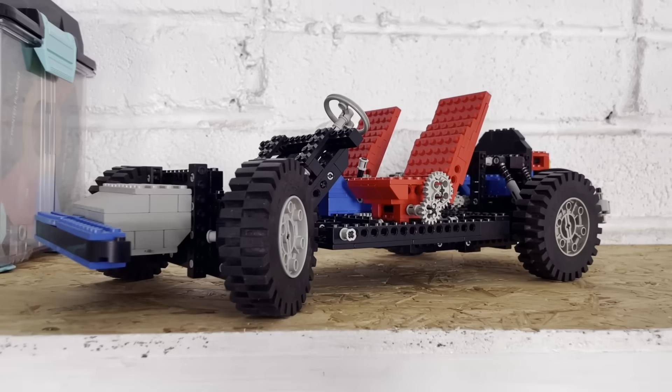You may already know that my first passion was Lego as a child, and my second passion was radio controlled cars. I built loads of radio controlled vehicles. It's one of the things I've always enjoyed doing, so building something like this is just going to be enormous fun, and it's going to be useful because I have some pretty difficult terrain outside. I'll show you that in a minute.

But before I go too far into this project, I better find out if my second-hand lawnmower purchase actually works.

Well, I'm pleased with that. The mower started really easily and it's cutting the grass really well. In fact, the grass is probably way too wet to cut right now. It's areas like this which are pretty hard to cut by hand. Trying to push the mower along a gradient or up and down a gradient is just hard work. In fact, it wants to tip over.

So this is where I hope the radio controlled beast is going to be way better. Feels like I'm going to have to make it very low center of gravity and also quite a wide track. Oh, it's going to need a lot of power too.

Let's take a quick look at the donor lawnmower for this project. It's actually a mulching lawnmower by a company called AS Motor. I think that's a German company. And a mulcher differs in the fact that it just chops the grass up inside of the deck here. It doesn't collect it and it doesn't eject it, which is ideal because effectively I'm rough cutting a lot of this area. And the push handle has to go, but I'm hoping to keep the height adjustment.

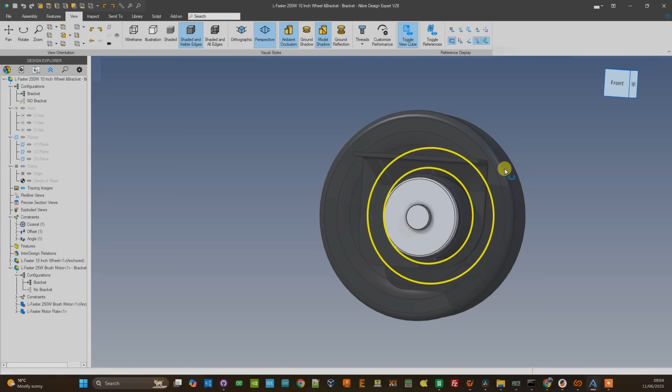Here is the L-Faster motor and bracket assembly, and here is the AS Motor mulching lawnmower model. The engine block is very basic, but it gives me its outer dimensions. I have modelled this mechanism, which is the height adjust mech.

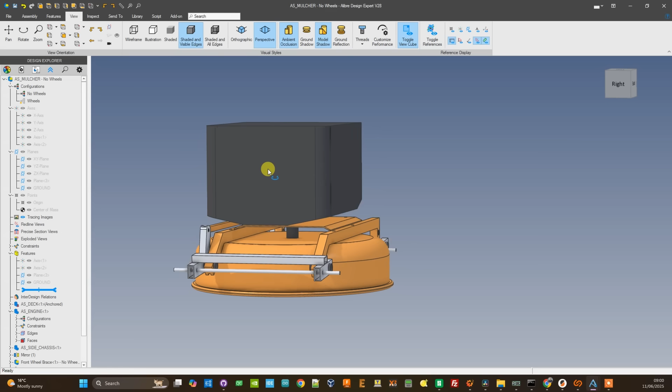The current idea I have is to remove the wheels and then build a frame around the outside, which will then attach to my new set of radio controlled wheels.

Here is the lawnmower fitted into my basic frame, which is 2060 extrusion with some custom motor brackets. The problem is it makes the wheelbase very long, and it's because I'm trying to utilise the existing lawnmower's lift and raise mechanism. The problem with having a long wheelbase is that it won't want to skid steer very easily.

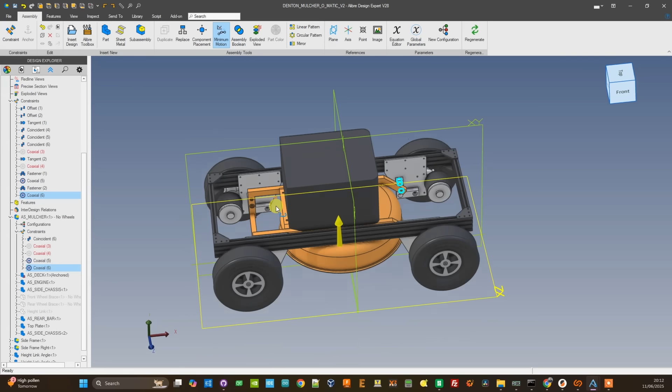So I decided to remove the front and rear axles and bolt directly onto the chassis. This might save a bit of space, but actually it didn't really make any difference. To get the same 60mm of travel up and down, I still have to move forwards and backwards 60mm on the same framework, which is just a waste of space.

So the wheels have to go, the front and rear mech, the chassis, and what I'm left with is the deck and the engine. Here's where I'm at with the current design.

It's a much stockier looking machine, and you can see I've managed to get the wheelbase quite a lot shorter. I've also gone a little bit narrower so you're not missing so much grass on the sides.

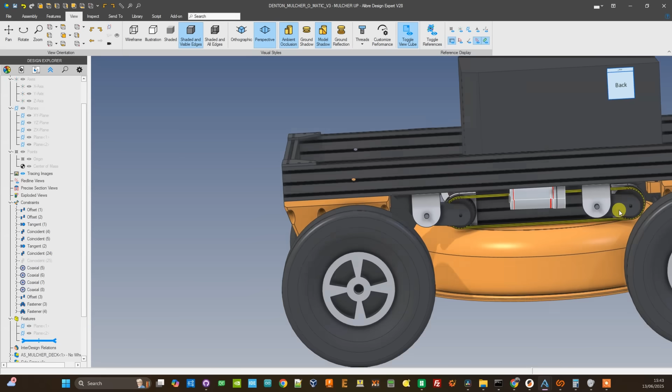The deck is now mounted with some 2060 extrusion, like the rest of my chassis is made out of, and that is also mounted via some linkages up to a linear actuator. Of course, this can be raised and lowered to set the height of the cut, and in the highest position should be out of the way so there's maximum clearance underneath.

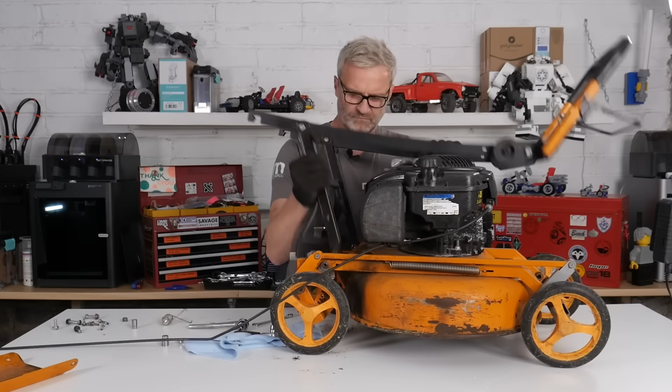Okay, let's get this machine stripped down. Yay! If there was one ball left in the ball bearing, now there's none.

Which way does the nut on a lawnmower blade spin? Anti-clockwise when viewed from underneath, which means that it's standard thread, and anti-clockwise spinning blade when viewed from the bottom. So anti-clockwise to undo the nut.

The Torx bits, I'm going to try the impact driver. I really don't like using them on small rusty bolts like this, but I can't seem to get any purchase or torque on this. It's not stripping it, but it isn't moving either. I really don't want to break them.

I thought I'd try one last trick to get this moving, and it's worked, and that is to go forwards a little bit before you go backwards. I've also soaked them in WD-40, which is probably helping.

The problem with lawnmowers with steel decks is they always end up rusting, so you do have to look after them, which most people don't. This one isn't too bad, to be honest, but once I got it apart, I should probably give it a coat of paint just to protect it.

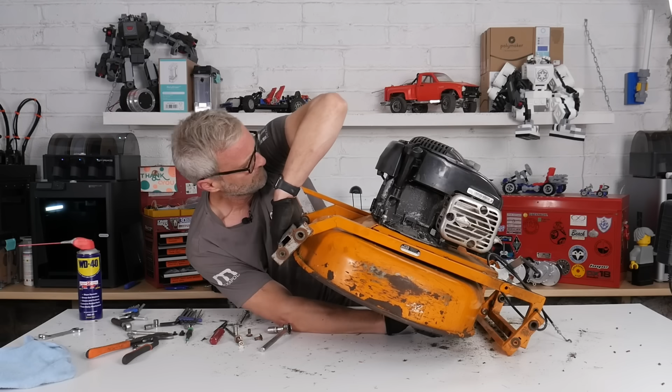Yay! Number 2. There it is. I hope that's supposed to drop out.

Steel on brass, there's like no bearing. Well, whilst I've got the deck off, I suppose it's a good time to clean it up and maybe give it some fresh paint.

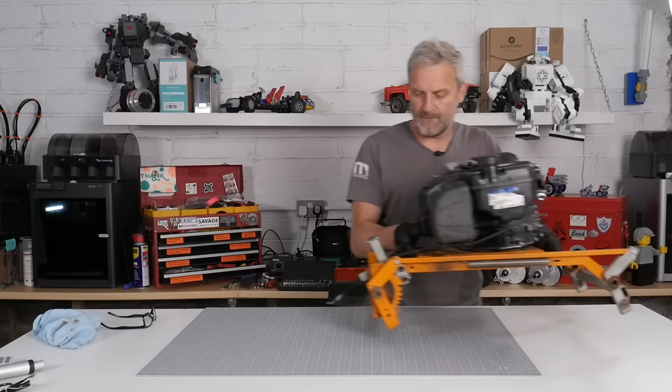I've had a tidy up and I'm ready to remove this engine from the frame. Now that's good, the keyway has stayed in the motor shaft.

So this is what I'm left with: the engine, the blade, the engine coupling and the deck. Yeah, I'm well aware that I could have bought all these bits individually now. I genuinely thought I was going to use the chassis and raise and lower mech, but there we have it. These projects change as they go along.

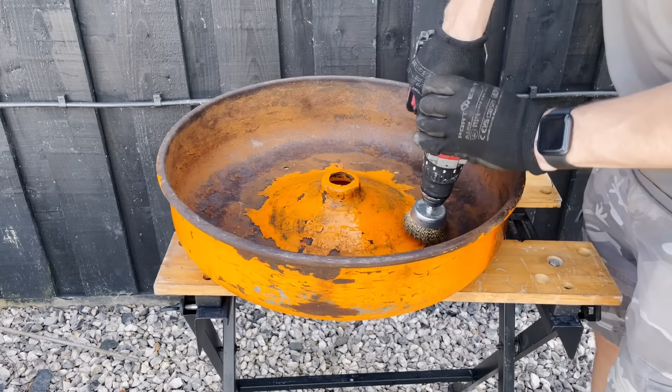Let's move on. While the deck is off, I thought it would be a good idea to give it a freshen up. So first of all, I remove all the flaky paint and rust, then give it a spray out with some brake cleaner. Next, I'm going to apply a layer of Hammerite Kurust. This kills the existing rust and turns it black and blue in colour, then you can paint over the top.

One hour later, you can see the Kurust has turned black. I'm going to paint with two coats of Hammerite red oxide paint. While that's drying, I'm going to crack on with something else.

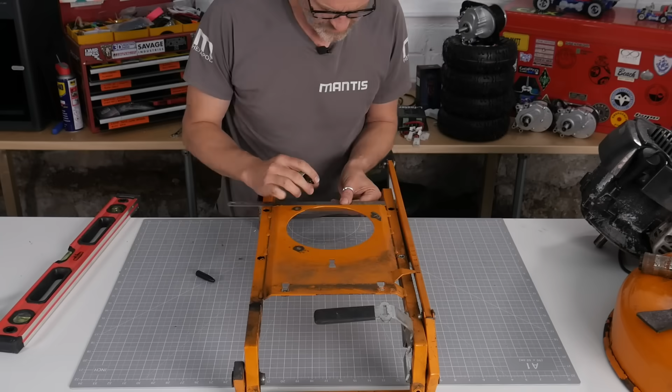There's no determinable pattern on the engine mount holes, and I couldn't find a specification sheet online so that I could take them from a drawing, so I've had to take some very careful measurements. I can now transfer these measurements onto my engine mount flange, but I will have to redesign the flange slightly because at the moment one of the holes goes right through one of the folds.

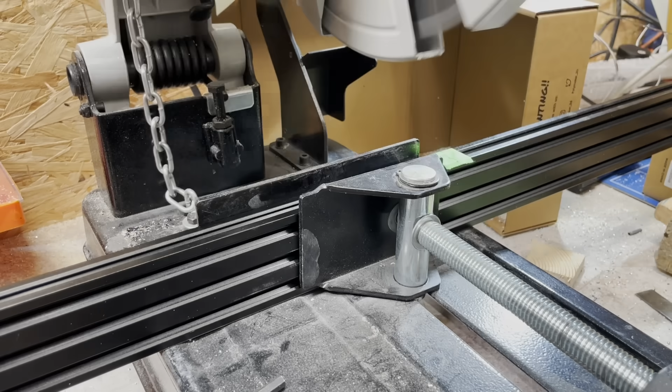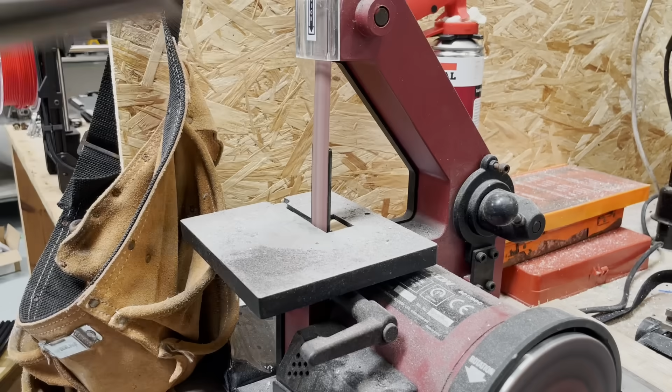The 2060 extrusion has arrived, so I'm going to cut my chassis pieces to length. This extrusion was slightly cheaper because it was classed as seconds, however I wasn't expecting it to be partially anodized on one side. Having carried out all of this design in CAD, I feel it's time to start assembling the chassis so that I can test that it all goes together.

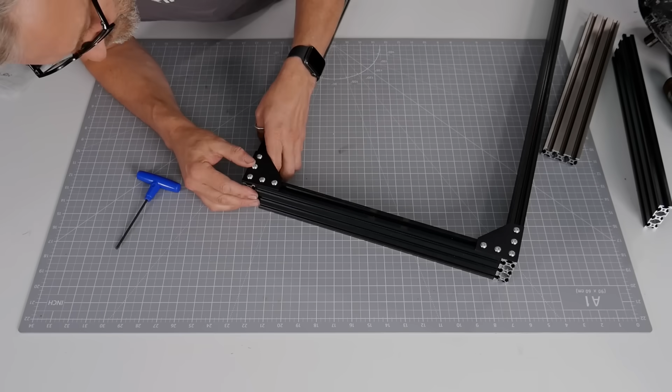Once the chassis is assembled, I can also test the radio control kit. As of now, I have no idea if it's going to be powerful enough, or the right speed, or whether it's going to work. I'm trying to keep the assembly as square as possible as I go. I may need to adjust this once it's all together.

I'll print the corner blocks on my Bambu H2D printer. Once I'm happy everything fits together well, I'll reprint these with more infill and perimeters and in a high temperature PLA from Polymaker. You can see the CAD model wasn't quite correct because the holes don't line up, so I'll just fit these together with a single fitting for now, just so I can test this chassis build out.

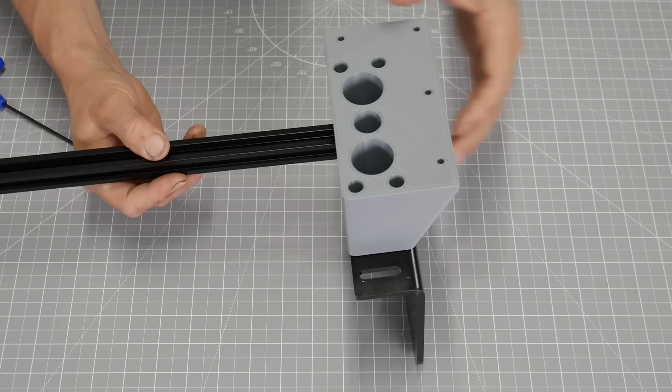In order to make the chassis design easier, I put these holes where I needed them rather than trying to line them up with the slots, so I do need to drill a couple of holes in the motor plate. I'm going to use a simple 3D printed template. This locates in the existing mounting slots and gives me the position of the new holes.

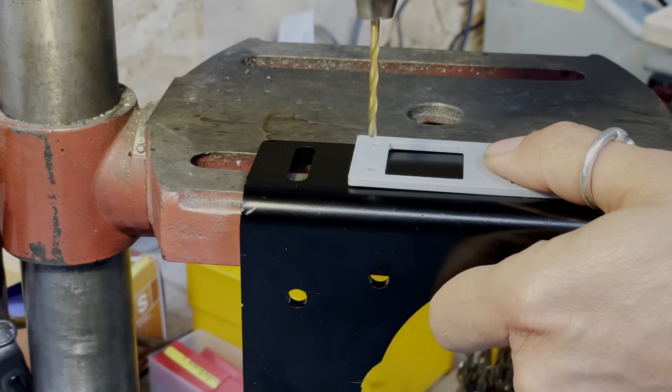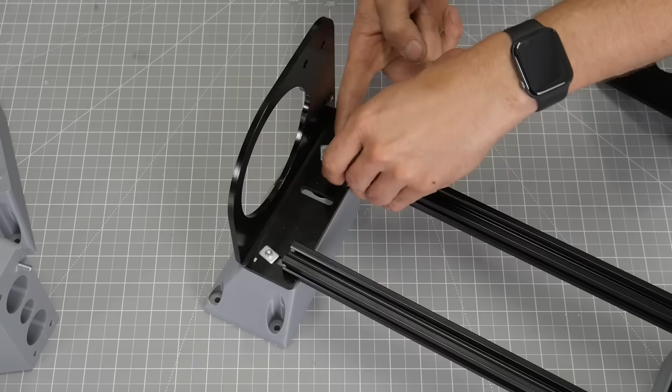There's a little fiddly getting this whole chassis bracket assembly together, but everything's finally lining up and I now have two sets of wheel brackets.

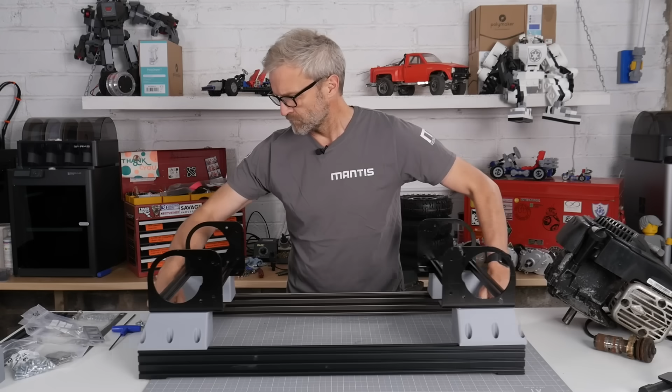These corner blocks haven't aligned really nicely with the corner of the chassis, but the beauty of using extrusion is that it's easy to adjust.

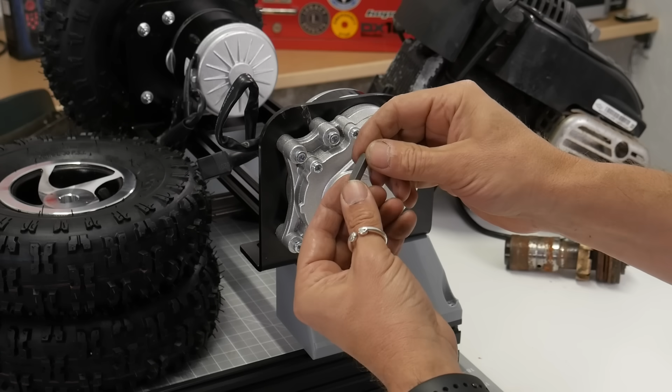The output spline on the motor and the hub on the wheel have a matching keyway to stop them from rotating, and they're held in place with a single bolt and washer. I may add a small amount of thread lock or an anti-vibration washer as well.

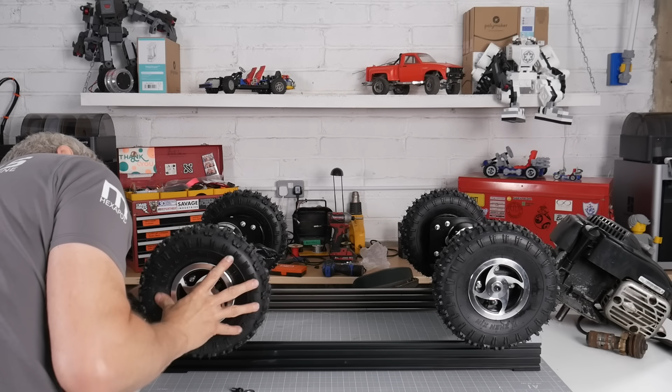I love it. I need some air in the tyres because they're flat. Imagine what it's really like when this engine's on and all the orange detailing and stuff. It's going to look epic.

All I have to hope is that it actually works, because there's a lot of weight, and to skid steer something takes a lot of torque.

Now I've gone for the slightly higher speed motor set, so they do up to 6 kilometers an hour. There was a higher torque, lower speed set at 4 kilometers an hour, but I thought that was a little bit slow. But I'm hoping they're still powerful enough. I mean, it's 1,000 watts of power.

But the only way to find out is to get the motor controller on here, some batteries, and then take it for a little spin. I've just temporarily fixed the motor controller here, and I've got a 22 volt LiPo battery to run it all on. Let's power up.

Got a big fan, I've got flashing lights, turn the controller on. Perky sound. That's gone solid green, that's good. Let's just try it.

Hello. That looks really fast. I mean, for a lawnmower, it's way faster than 6 kilometers an hour. Oh no, have I gone for the... Should I have gone for the high torque?

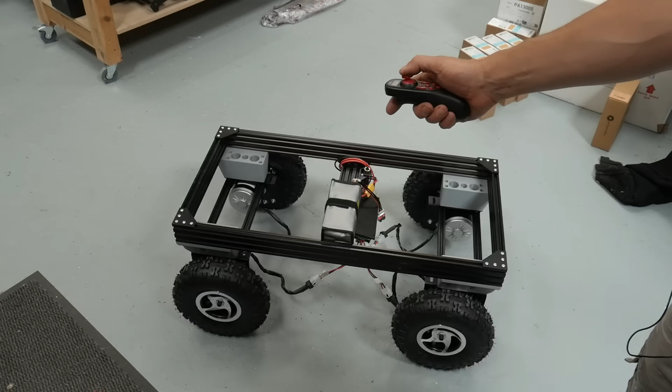Let's get it on the floor and try it. It is turning pretty well, but then this floor is slippery, so I would expect it to. The slow speed control, that's about as slow as it will go. And I feel like there are times when you'd want it slower than that. Is this a terrible idea? Okay.

Well, that's got plenty of power, and it will steer on the spot with 85 kilos on it. That's pretty good. Not bad at all, but it does seem pretty ferociously fast. The acceleration is crazy. It's too much really. Well, there's not much I can do about that.

Of course, there are things that could be done. For example, I could run it on a lower voltage, like 12 volts, so it would halve the speed. The problem is you're only going to get half the power, reducing the output to 500 watts. That might be enough, so maybe that's an option.

I could replace all the motor gearboxes with the 4 kilometer an hour versions, but that might be quite expensive. Or I could try contacting Faster and see if it's simply a case of swapping some gears out, because they might do replacement gear sets for these, and I wonder if the casings are the same, just a different gear combo inside. So I'm going to try that first.

I know it sounds weird, I'm sure people are thinking you want it as fast as possible, but actually when you're trying to do precise things like mowing a lawn, you need control at slower speeds, and at the moment this feels like it's going to be too difficult to control at low speeds. I want to continue the build anyway and try it out, but that's my first concern - I think it's too fast.

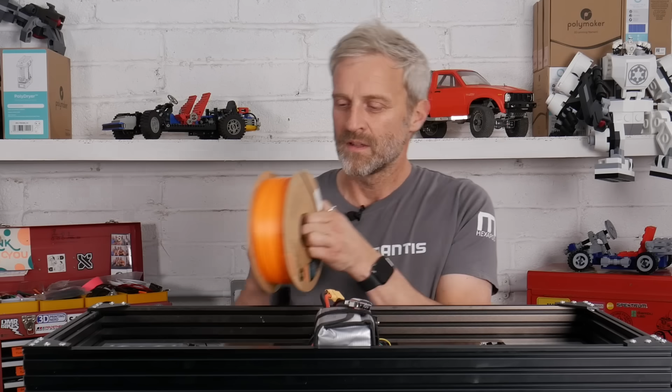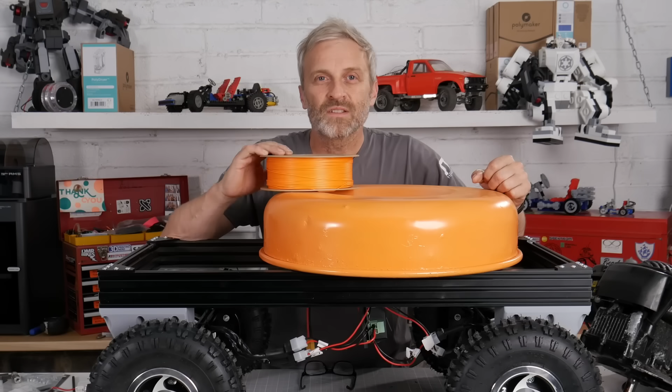I've just received a shipment of a couple of reels of Polymaker's new high temperature PLA in orange, which looks beautiful, especially next to the deck I've resprayed. Look at that, it's going to look peachy. So I'm going to load this into my Bambu H2D printer and print these parts out in a much stronger version. Whilst that's going on, I'm going to take this outside and test it on some rougher terrain.

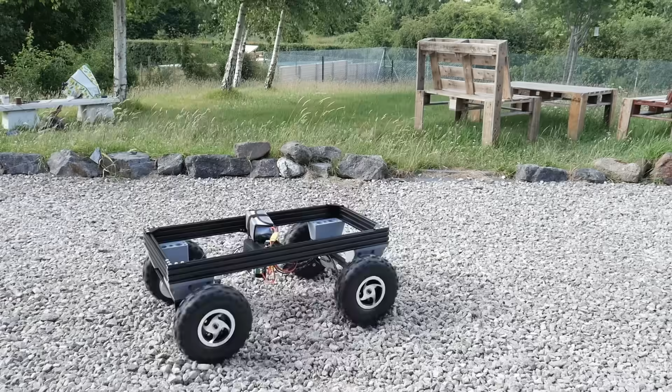My very weak PLA mountings gave way very quickly when I tried to turn it. I got carried away with my test rig there, forgetting that I'd only put 2 bolts either side. It ripped through the bottom layer, maybe the top layer too, and there was only 2 perimeters and very little infill. I've printed a new one which has double everything - 4 perimeters, double the infill, and double the top and bottom layers.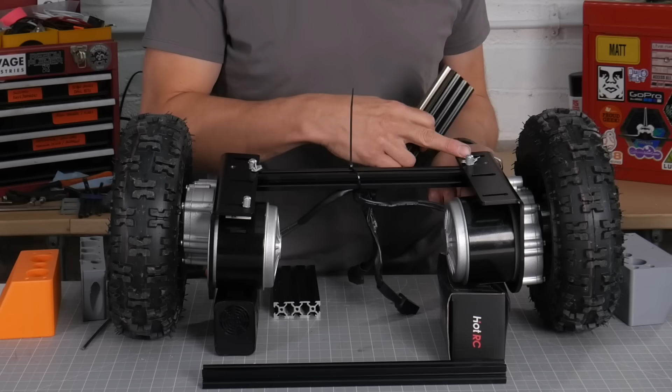But the more important thing now is that I'm printing it this way on the bed, whereas this one was printed this way on the bed, so the layer lines are much better aligned when it's mounted on the chassis. I'm also going to add some additional aluminium extrusion, bolting through the back of the motor plate, through this part here, and then into the side of the chassis member. I'll also add some steel webbing for strength, then test it all again under some proper load conditions.

Here's the new completed chassis. I've got my additional bracing down to the motor plates here, and some additional cross bracing across the chassis which also connects to those down braces to the plate, and of course the new and improved 3D printed corner blocks. I'm going to stick the wheels back on and then take it for another spin. Oh god, this is going to be a 2-man lift.

Well, this is the point where it failed yesterday once the traction in the grass was too much. Well, I don't know about cutting the grass, I can just tear it up with the wheels. Well, that seemed to be behaving pretty well.

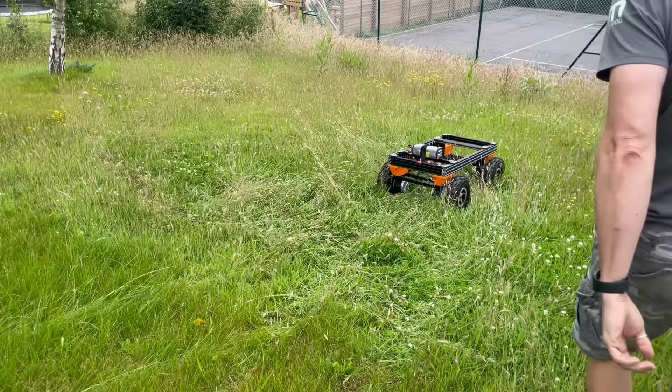Of course, I've got to try it under load, so loads of power. I don't know about turning. Oh well, God, that's churning the grass up, but that's way too much load for this. It's working pretty good because it's going to be at least half my weight, at least.

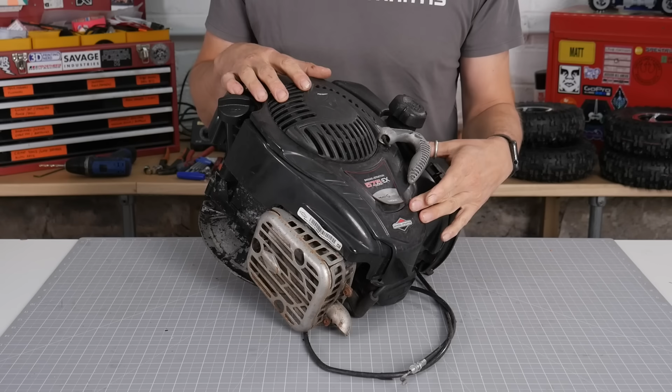I'm currently waiting on some parts to arrive, so I thought it would be a good time to take a look at this engine, how it runs and how I'm going to control it. This is a Briggs & Stratton engine, 140cc, and I'm going to leave it as a pull start, so you have to manually start the engine, but I need to be able to remotely stop it.

So I'm going to start by taking this pull start lid off. What we have under here is the pull start mechanism, which attaches to the underside of here. This flywheel, if you like, with cooling fins - it's really quite a neat design because effectively it sucks air down through and over the engine fins to cool the engine. But it also acts as the spark generator, this piece here. As this spins around, there's 2 contacts here, and that generates the spark with the correct timing for the engine.

I love the simplicity of it. Here there's a piece which goes into the exhaust pipe, and this little lever here which comes across. So this is the carburetor, and this little lever is attached to it, and in here is the air intake and air filter. So this is effectively like an automatic choke. When the engine's cold, this sits here, and when it gets hot, this moves across and changes the mixture.

The thing I need to be able to do is stop this engine remotely. Currently this cable here is usually held on by the user on a big grip to enable the engine. What that does is release a brake off of this spinning mechanism, and it also disengages this little basic switch which shorts a wire to the chassis.

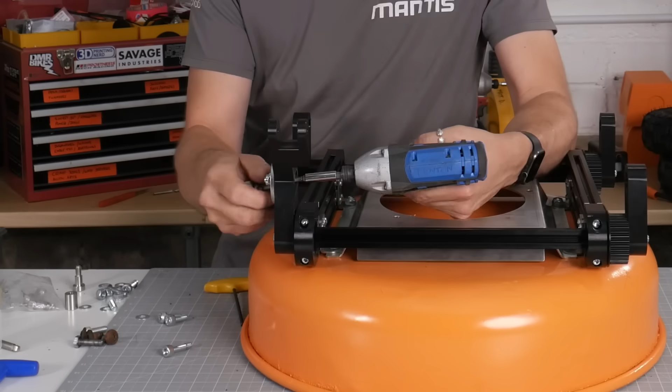Now the distance from one side of the chassis to the other is 420 mil, at least on the CAD drawing it is, and that is 420 mil. Let's have a look at the back one. 420 mil. Boom! Get in! I love it when a plan comes together. I wonder if the chassis is actually 420 mil though, which it might not be. I'm going to measure it. Hang on. 420, maybe 0.5, so pretty good.

Keyways in. There's one. There's two. And there's three.

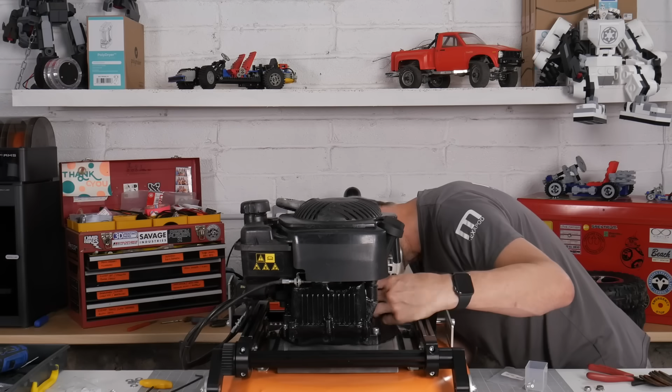I'm happy with that. As per the original design, the original lawnmower, you have to take the chassis off and the plate before you can unbolt the motor, which is a pain. So, do I take that lovely folded stainless steel plate off and grind down that front fold so it's shorter, so I still have the strength but I can get a spanner under? Or do I just bolt the motor onto it and be done? The problem is it's going to be hard to adjust if I need to make any adjustments without having that.

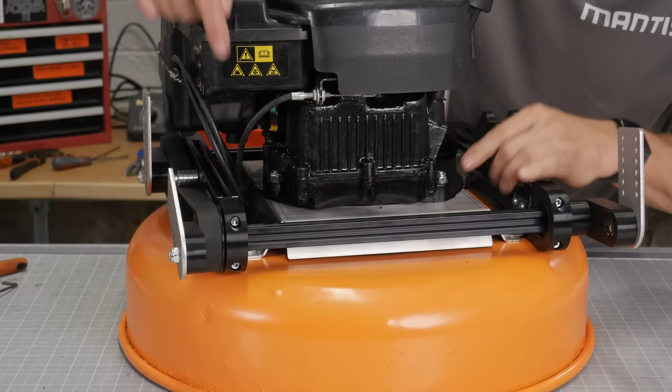Conundrum. I finally made a decision and went ahead and bolted the engine down to the stainless steel mounting plate. So that now if I want to make any adjustments, I'll have to loosen the stainless steel plate from the decking to move the motor around. It all feels pretty solid though.

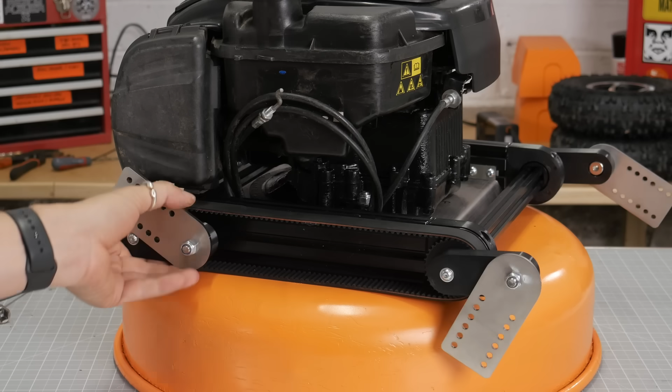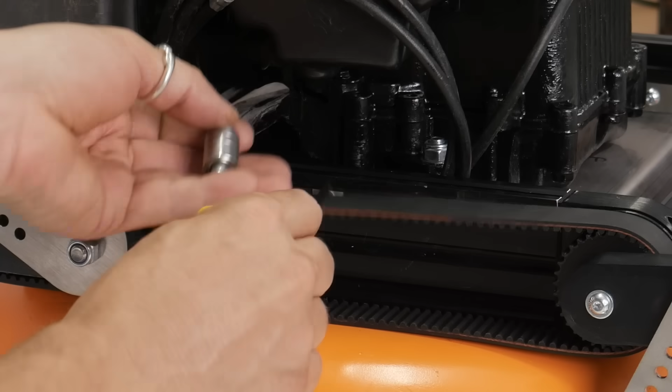I now have the timing belt, so I've been able to fit the front and back sections together. However, it turned out to be way too loose, so I've had a 3D printed shim that sits between the bearing holder and the aluminium extrusion. I can tighten this further using a stack of bearings on an M5 bolt screwed into an M5 nut within the extrusion. This tightens up the whole belt quite nicely.

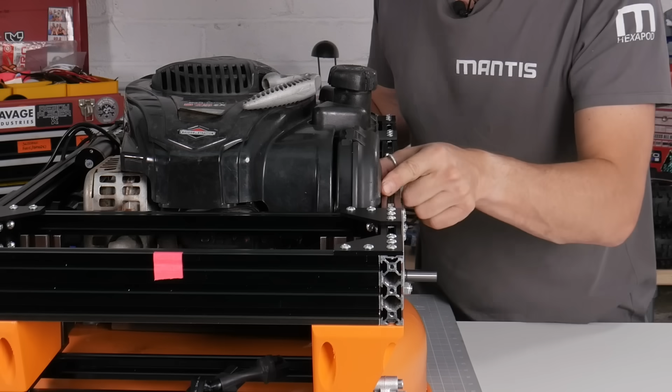Well, with much huffing, puffing and a little bit of cussing, I managed to get the chassis over the engine. It was a little tricky getting this in, and I will say that this side is very tight. The air filter is actually touching the side there. I mean, it's not hard pressed up against it, but it is right on the edge.

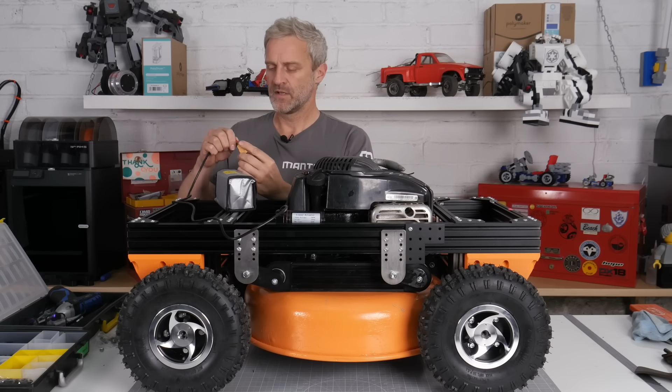Let's see if this linear actuator and the lift mechanism works. That's heavy. Don't know which way around to go. Oh, okay, so that's one end stop. Oh, that's smooth. I think it's worked. That looks pretty good.

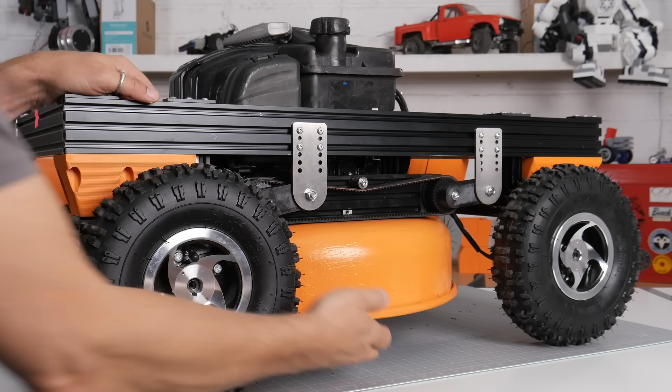Obviously working harder to bring it back up, but it is working. From this angle you can see that the left hand side is lower, and I can lift it back into position. The cause of this problem seems to be the 20mm extruded axle going across the front, which is being allowed to twist across here. This twist is allowing the left hand side lift arms to drop out of position.

There are a number of things I can do to limit the droop on this side of the machine. I could add a load spring which lifts this arm up, puts it under tension, or I could replace that front axle with a solid metal shaft that will stop it from torsioning, or I could replace the belt system with a single fixed linkage. However, none of this really matters at the moment - it just means my cut will be slightly skewed, and that doesn't really matter for a rough cutter. I'd rather just see if it works.

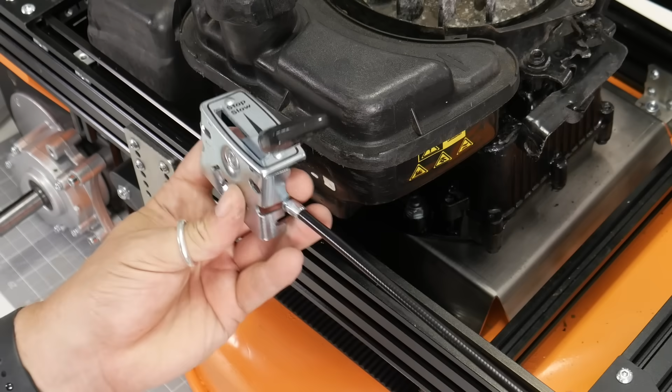I found this simple throttle mechanism that's made for lawnmowers that I'm going to use to replace the dead man handle on the lawnmower, which will operate both the electrical stop and the brake stop.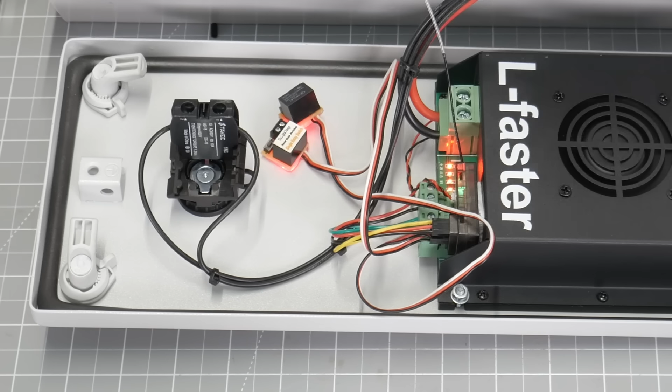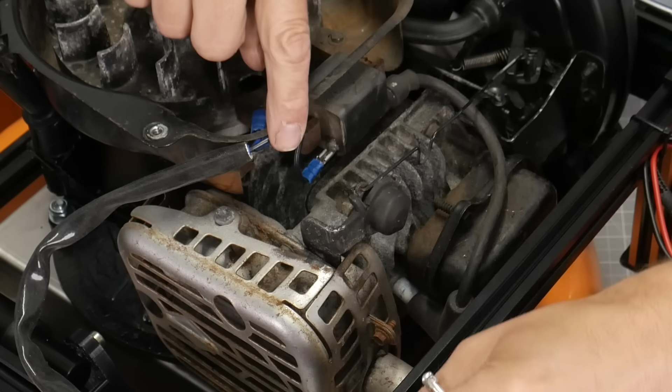I've added a loom to both sides for the left and right hand motor that runs down the chassis, and of course I've added battery cables to my batteries. I still have to finish off the wiring for my linear actuator because I'm waiting on the radio controlled relays for that. I've added the engine stop loom here, which runs through this piece of silicone high temperature sleeving, because it runs past the exhaust pipe, and it runs in parallel with the existing stop mechanisms. I've also added these 3D printed battery clamps to stop the battery from coming out.

I'm now going to install my electrical enclosure onto the chassis onto these 4 anti-vibration feet. I am slightly concerned that there will be quite a bit of vibration from the engine, so I have tried to use nylocks and anti-vibration washers wherever possible.

So I assume that's powered up, we should hear it. Yep. No. Is it because my remote control was not switched on? Yes, there we go. Now it's powered up because the remote's on.

Let's see if she works. Are they going forwards? They're not going forwards. Well, they're going forwards on that side, and this side they're going backwards. Have I got my left and right mixed up? What I didn't notice on the motor controller, there's a positive and negative for each motor output, but they'd switched the left-hand side positive and negative. I wired it positive to positive, negative to negative, but I need to switch them to reverse the left-hand side, and that should sort it out.

Yes, forwards on this side, left. Yes, this side's going backwards, right, yes, backwards, yes, bingo.

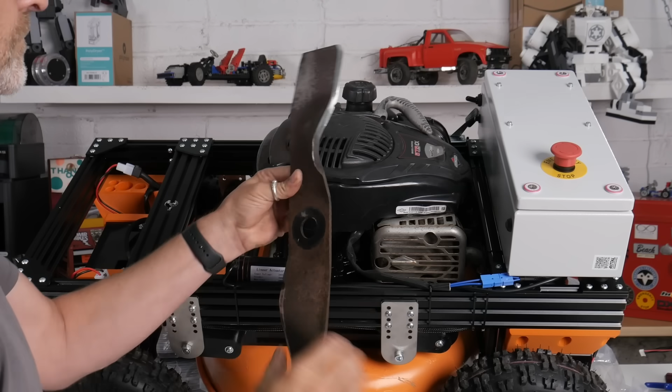All I've got to do now is figure out how I'm going to get this off the table, because that's heavy. This blade was looking pretty blunt, so I've just given it a sharpen up with a flap disc. As soon as I've remembered how to reinstall it, we'll take it for a spin.

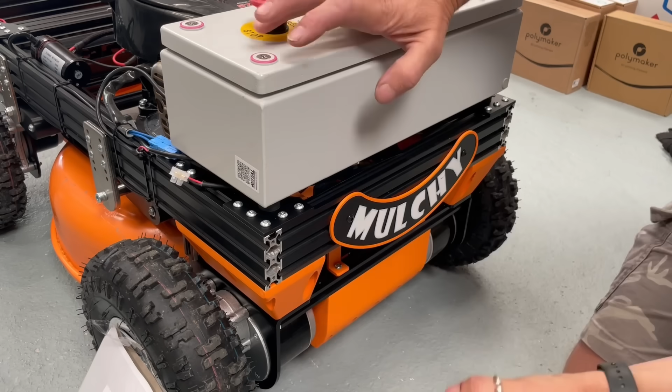No pun intended. I was going to ask my subscribers to name this new machine, but I'm fairly sure my English viewers would have come up with the name Mulchy McMulchface. If you don't know what I'm talking about, look up Boaty McBoatface. So I present to you Mulchy.

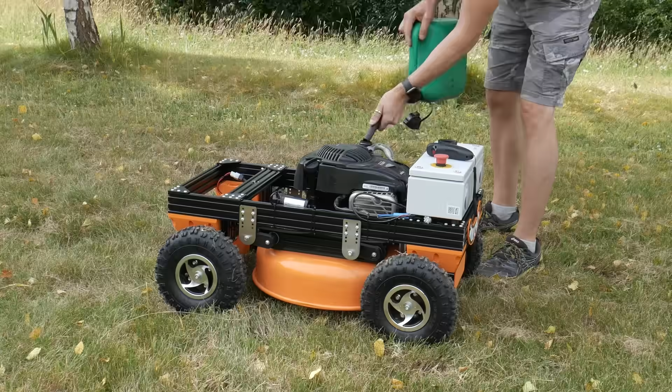Well, it seems to be turning pretty well. It is a little front heavy, so the back end wants to spin out before the front. So that's the brake off. Let's try.

All right, well, that's pretty good. Fired up first time, and the brake and shut off worked okay. Some grass over there.

Oh, I was going to say, look at it go, and then it didn't.

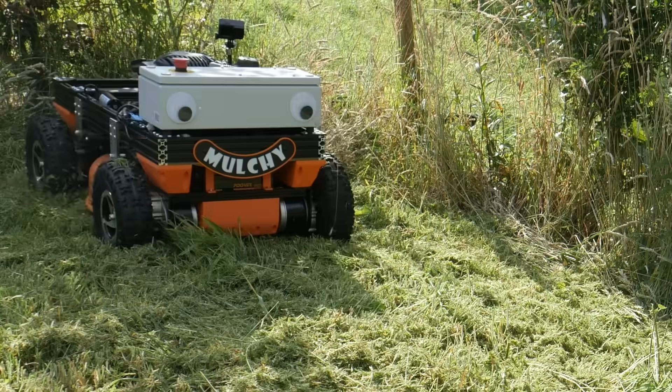I got Mulchy running again. Let's see how far we get this time. Come on, Mulchy. Plenty of power. Yes, Mulchy. Give us a wiggle of them eyes.

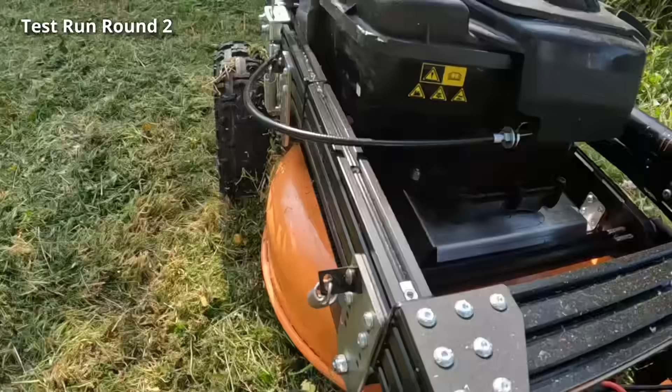I'm well pleased with Mulchy's performance. It's a working machine. I might have to take it in and check everything's tight now it's been running for a bit, but it feels pretty good and it's cutting grass well. The whole deck needs to come up a bit, it's way too low. Let's take a look in the workshop to see if there's any damage done.

I'm pretty keen to test Mulchy on the terrain that we saw at the start of this video, which is that embankment, which is quite steep. But before I did that, I wanted to do a few tweaks and upgrades. I also found out that the reason I was getting the droop on one side was that I'd fitted the brackets on this side in the wrong place. They were actually 10mm lower, so the whole thing was squiff. I was amazed it worked at all. Anyway, I've corrected that, and I've also lifted the deck by another 10mm, so that's going to give me more ground clearance.

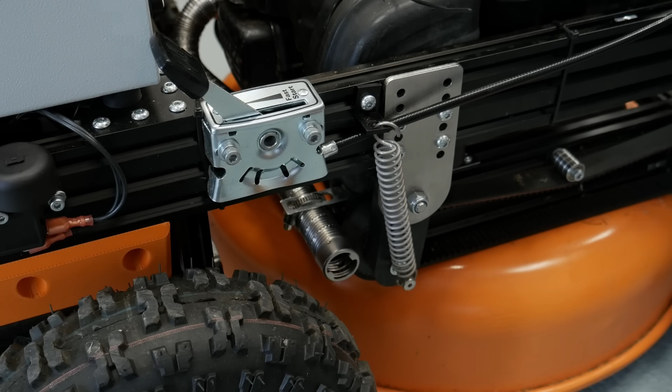I've got a green LED for the main power and a red LED for the e-stop system. I've now got a stainless steel exhaust that comes out the side here and is routed across the engine, so that hopefully will keep that horrible exhaust fumes away from all the delicate 3D prints. I've also now got the up and down lift mechanism working on the remote.

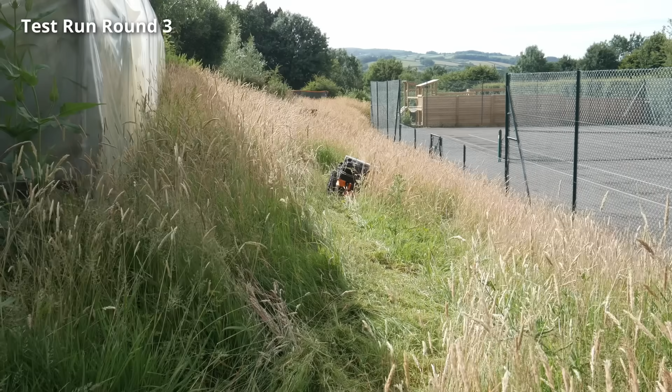I'm sure this gradient doesn't look very steep on camera, but I can assure you it is, and it's pretty rough terrain. I've left the cutting height as high as I can. Wow, it's sliding down the hill, like traversing. Come on, Mulchy, get that weed.

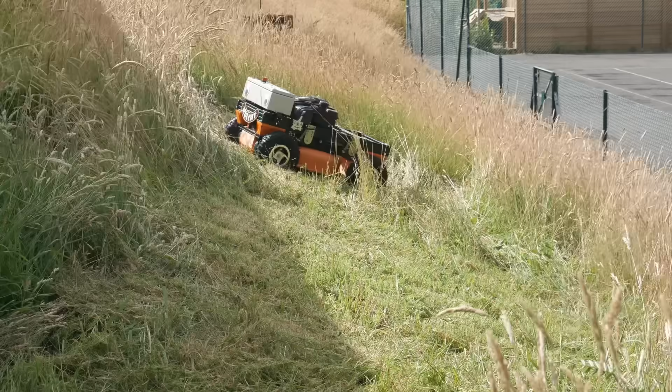This is pretty challenging as terrain goes.

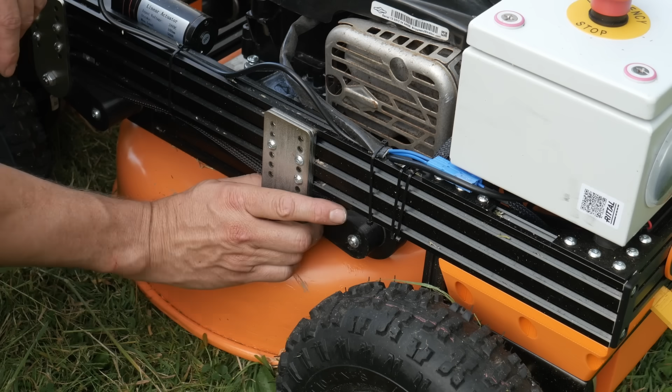So remember me saying that you should use anti-vibration washers? Well, there's a prime example. I'm missing a screw from there and a bolt out of there because that's way too low. It may well be that I end up having to Loctite a lot of these if they keep vibrating out, even with the washers on.

The lawnmower manufacturer says the maximum working gradient is 20 degrees, however the engine manufacturer says 15. This gradient is between 20 and 25, so I am over the limit.

I tell you now, this is a lot less back-breaking than strimming all of this. I will have to come over it with a strimmer as well, just to tidy up the edges, but one thing you need to be really careful of is that your glasses don't fall off and the mower doesn't mow over them. And the other thing is to make sure they're not the really expensive ones that are prescription.

Oh, that's not good. That'll be my nice sharp blade now blunt.

I've been hinting that there's more to Mulchy than just mulching, and if I add this ball hitch to the back here, you can now see why I've left the back end so flat. Now I can hitch up a garden trailer. This one's probably a little bit large, but it's the only one I've got. Something tells me this is going to be a lot of fun and very useful. And technically speaking, is this not now a ride-on mower?

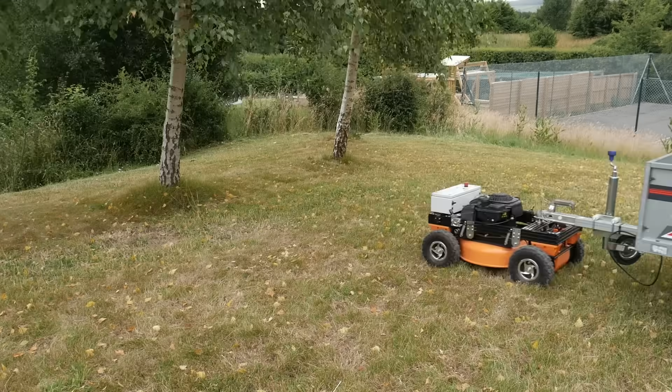It's really maneuverable and I can turn it on the spot. It's much happier running on the grass rather than the loose gravel because it gets a lot more traction.

I can no longer lift Mulchy McMulchface on my own, so I've had to set him up under my chain hoist on this temporary table. He's a bit of a lump, but that's good because you need a bit of weight to get grip.

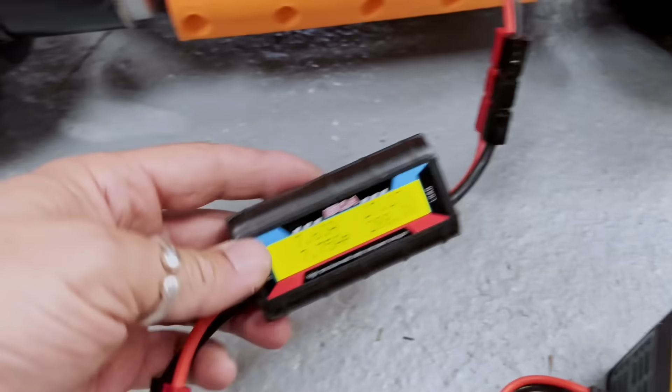Mowing the lawn outside, I used Mulchy for about 1 hour or just under, and it used 1 tank of petrol, and I was surprised to see how little of the battery it used. It only used about between 1/4 and 1/5 of the capacity, so that means I should get at least 3 to 4 tanks of petrol on each charge of the batteries.

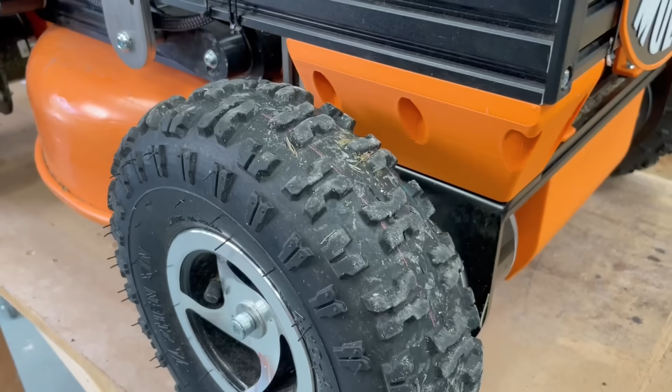That's really good. One slightly worrying thing is I've noticed that the tyres are wearing quite badly already. Now I did drive them for a very short period of time on some concrete, but it was literally only about 6 or 7 turns and then came off. Now I don't know whether it was just that small period of time on the concrete or whether they're just a really soft compound, but I do feel like these are going to be changed regularly if I drive it on a hard surface.

There are of course modifications I'd love to do to Mulchy. I'd love to upgrade the electronics to include an Arduino, and I'd probably go with something with Wi-Fi so that I could connect it to my internet. If I added some lights and an internet-based camera, maybe I could use them for my nighttime security patrol. I like the idea of adding features.

One feature that might be fun to add would be a strimmer arm that comes down, so once you've done your mowing you could go around the edges and strim. What about a shovel attachment that comes down in the front like a proper skid steer? Might be quite useful. I can imagine if it snowed it would make a great snow clearing device, although we don't really get much snow here.

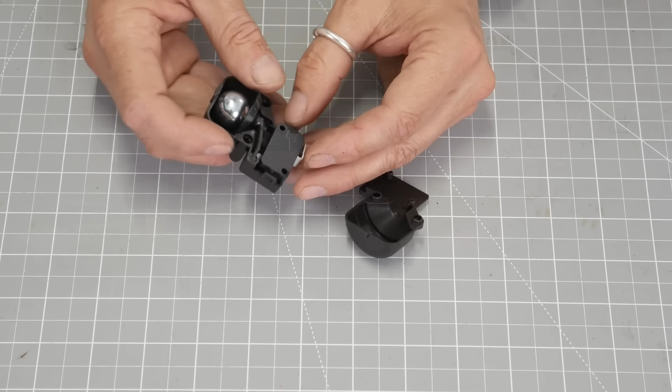One thing I must add is a tilt sensor to switch Mulchy off if it was to roll over or go above a certain angle. I did find a really nice electromechanical solution that I added into my e-stop circuit. The problem was that any vibration on the sensor would also trigger the tilt, so if Mulchy was bumping on the ground it thought it was tilting and would switch off the e-stop. So maybe I'll do that in the Arduino with an accelerometer or an inclinometer.

I can't tell you how much more fun it is driving this round the garden with a remote compared to pushing a lawnmower. I bet my neighbours are going to want to use it.